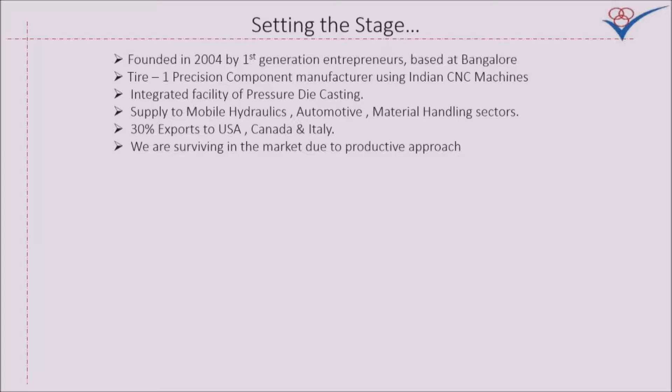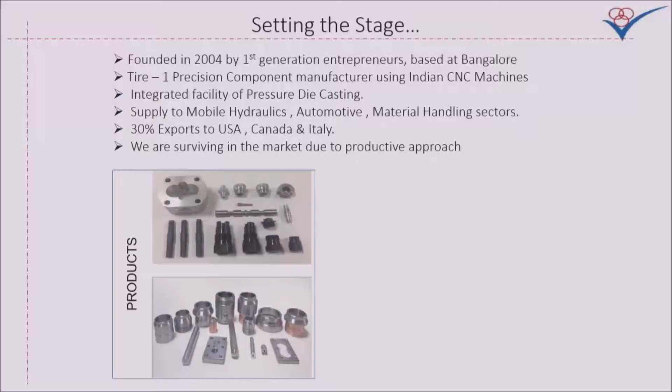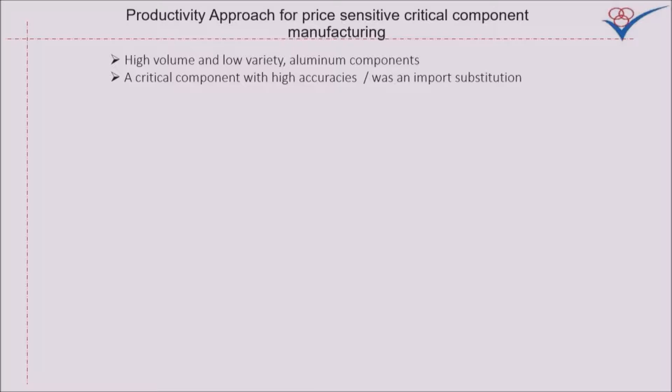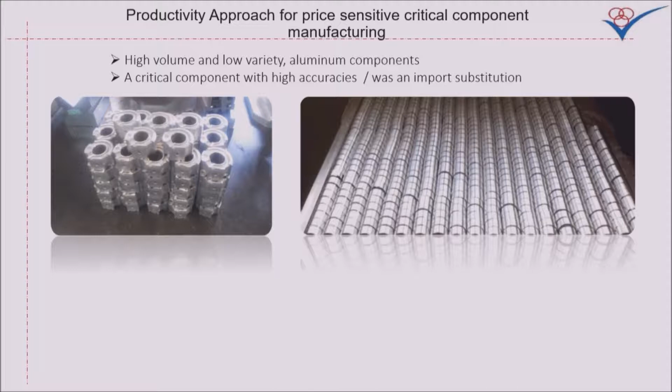Coming to the case study, this is a productivity approach for price-sensitive critical component manufacturing. This component is the object of the case study - required in high volume and low variety. It's an aluminum component, a critical component with very high accuracies. This goes to hydraulic gear pumps, so it required very high accuracies and high volume. When we started this, it was an import substitution - it was happening in Brazil, Germany and UK. Just to get a feel of it, this is the component I'm talking about.

The very interesting fact about this component is it's required about 8 million pieces per annum. The Indian requirement is about 2 million pieces. As of now, we are very successful supplying these 2 million pieces to Indian requirement. Our objective was to expand, because the same component is used in Germany and Brazil. So our objective was to produce this component in the most productive possible way.

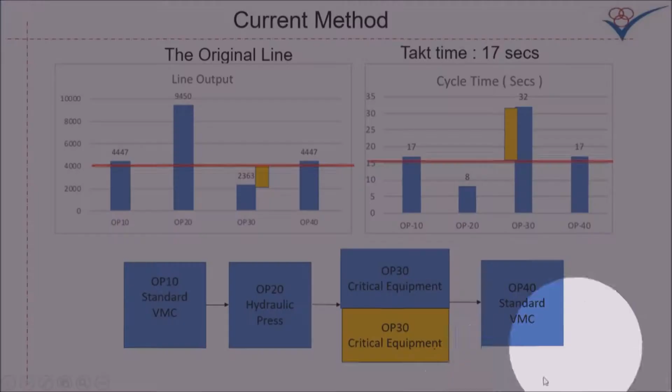Let's go to the current method. We started this originally in 2013. At that time, this was the line we had - OP10, OP20, 30 and 40, the 4 operations. We had done a line imbalance, and the balancing was done by adding the OP30 two machines. So cycle time, my takt, was 17 seconds.

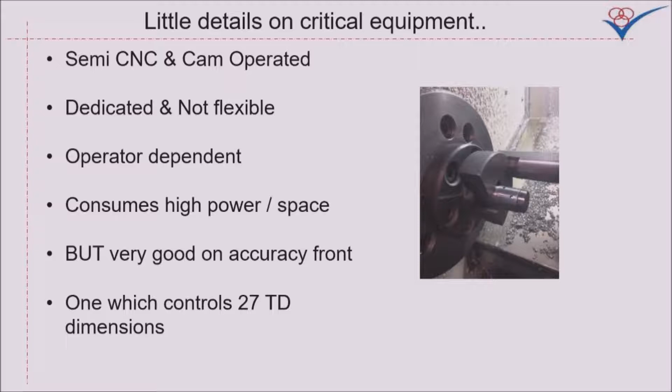We should say something about this OP30, which is the focus area of this case study. OP30 was a machine which is semi-CNC and CAM operated. It was dedicated, not flexible, and operator dependent. There was one stopper which would come every cycle in between. For that, the operator would press a foot pedal or cycle start, and this was adding time. What we saw was the operator, at the end of a 12-hour shift, would have pressed the foot pedal 2,400 times - a huge fatigue factor. But at the same time, it was very good on accuracies - it was controlling more than 27 TD dimensions in this particular operation.

Everything was good till 2015 - we were supplying, we had established good quality, cost, and deliveries. Because of that, quantities jumped suddenly from 4,000 pieces per day to 8,000 pieces, because the customer wanted to localize these components, and also the market grew and cost pressure was phenomenal. This was a good opportunity for us to take it forward. During this period we had done a lot of continual improvements, kaizens and all that, but when the jump was sudden, we felt this may not support - we will have to go for an innovative solution.

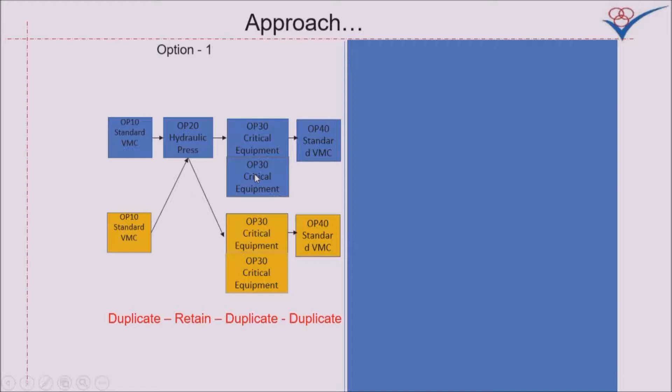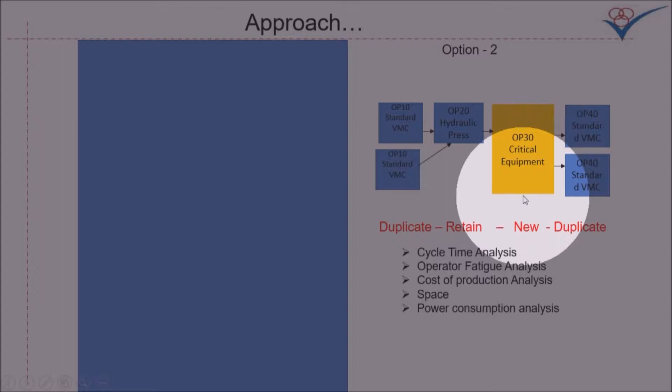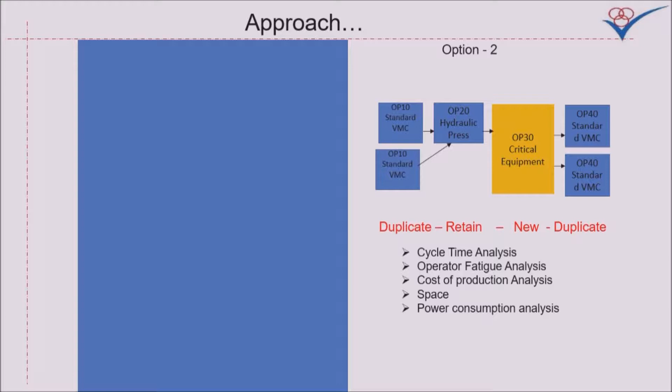This was an invitation to innovation. We had two options: Option 1 was to repeat, to duplicate the existing line and go ahead with established methods. Option 2 was to focus - because we didn't have much problems on OP10, 20 and 40, but we wanted to focus more on the OP30 area. We subjected this operation, this machine, this whole machining system, to various analysis. What we observed was about 47% of the time was used for loading, unloading, and the stopper coming in and going back.

This was required to achieve the required accuracies. The cutting time was only 53%. Of course, cutting time adds all these XYZ movements. So this was one big area of improvement which we wanted to address.

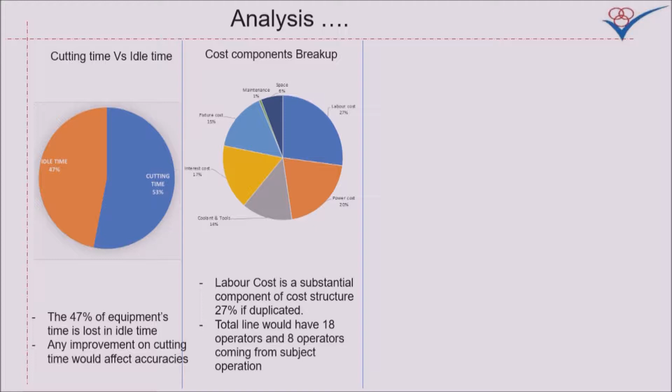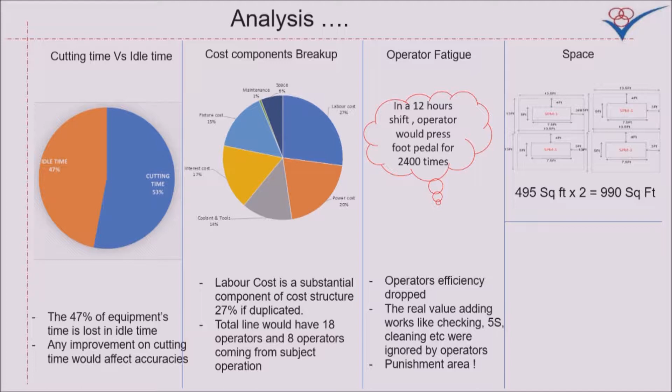We observed that the labor cost would have been 27% of the total conversion cost if we duplicated the machine, because we would require 8 operators for this operation. We are an SME operating 12-hour shifts, so fatigue factors would add up. The operator would press the foot pedal 2,400 times in a 12-hour shift. Operators started feeling that it was a punishment area to work on this. Of course, space consumption would have been 990 square feet if we duplicated, and power consumption was also more.

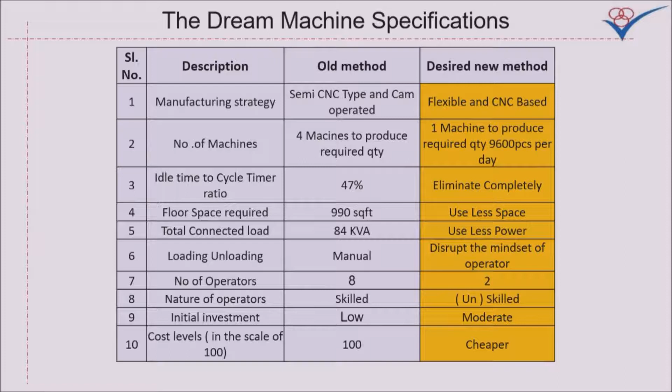With all these considerations, we arrived at the specifications of the desired new method. We wanted a fully flexible CNC machine, one machine which could produce 9,600 pieces per day, and we wanted to completely eliminate idle time, use less space, less power, and possibly use an unskilled operator to run the show.

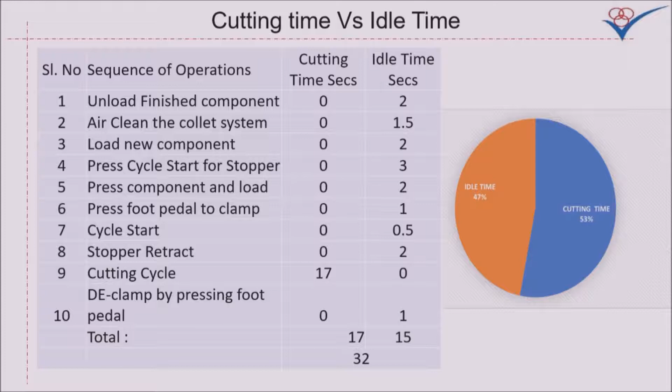So this was just a breakup of how we did the analysis of cutting time and idle time. It's 47% versus 53%. When the quantities jumped from 4,000 to 8,000, the new takt time was 9.5 seconds.

The shift output required was 4,800, and the day output required was 9,600. My machine, whatever we want, should have the capacity to produce 9,600 pieces per day. So we would require 4 machines to reach this quantity. We derived certain inferences out of this.

Probably in the whole of my case study, these two sentences are, I would say, the essence of the whole case. The current cutting time was 17 seconds. It dropped... takt is 9.5 seconds. It meant that 2 spindles should work at a time.

And the idle time, we didn't want to take any idle time. This meant that the working spindle should only work, it should not do anything else, it should not be used for any loading or unloading. Precisely, I would say we wanted to mask the loading, unloading. But these are turning operations, so masking in turning was a question.

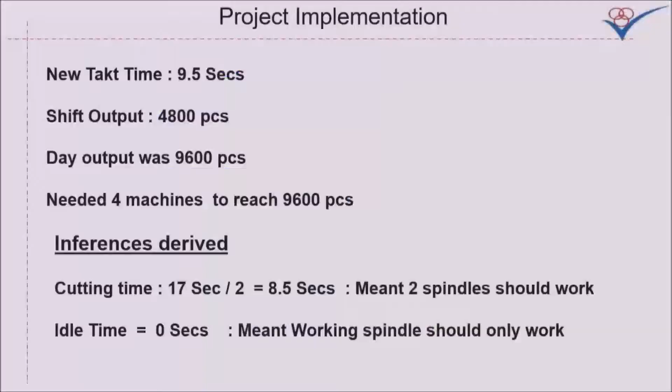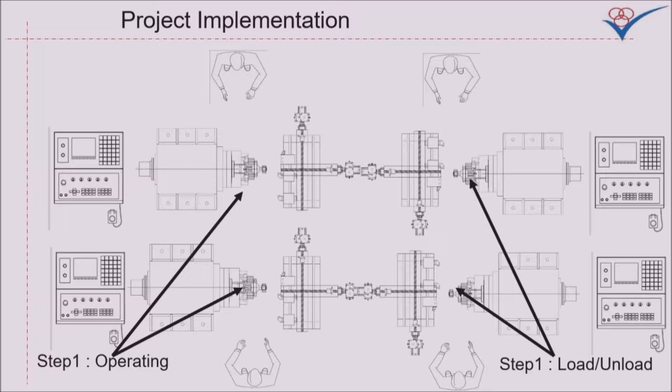When we decided that, we had decided that 2 spindles should work operating, and this should be only operating, it should not be used for loading and unloading. The other side, the 2 spindles can be used for loading and unloading. That is the combination. By doing this, these 2 slides were not required.

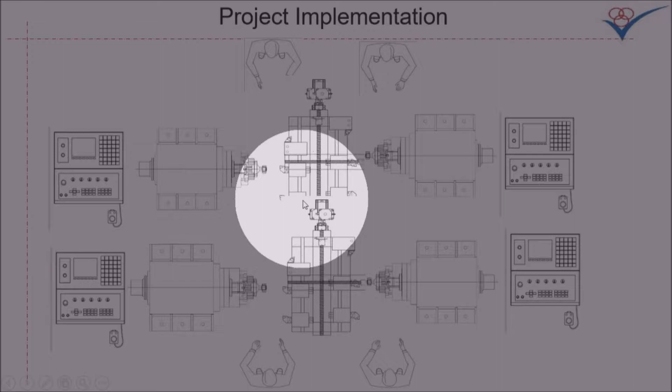So the revised configuration looked like this. The tools could be mounted onto the same slide on the left and right, and because when loading unloading is happening here, these tools have no work, this same slide can go on the other side and finish its work. When it finishes, this side can be used for loading, unloading, and the other side can be used for operation. This eliminated 2 more CNC systems and 2 more operators, and the whole system would have looked like this.

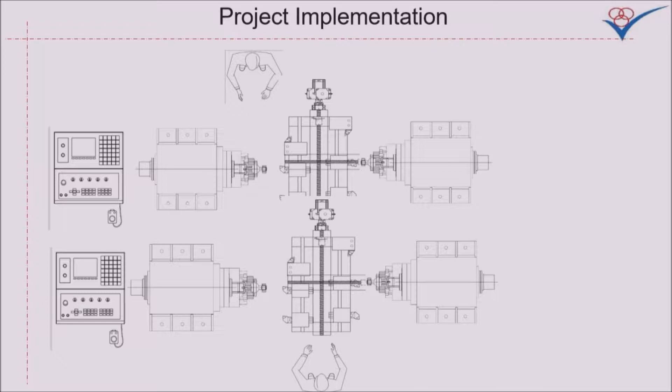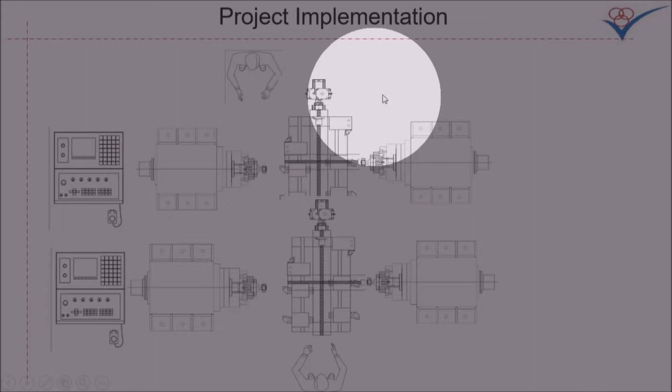But the cutting time is only 17 seconds, and in this 17 seconds the operator would have done the loading, unloading here, and also look after the cycle operation of the component. So with just 17 seconds, we already had a huge fatigue factor for the operators, and we felt that this is too small a time for operator efficiency. So that is when we thought that this is the system which is suitable for robotic implementation.

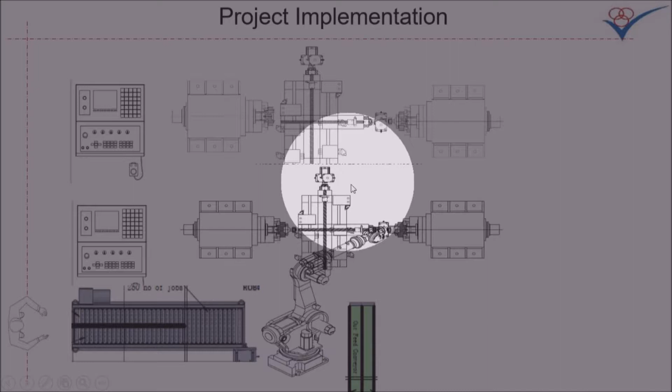Robots do not come alone, they come with all these infeeders, outfeeders and all that. So we would have reduced the whole system to just one operator who would do the component loading onto the conveyor. So this is the overall configuration derived for the machine.

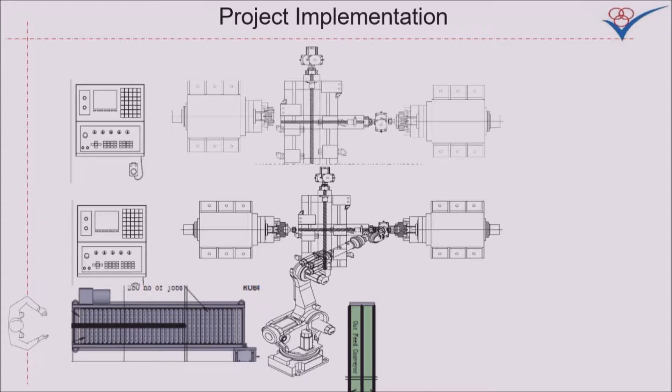This was precisely looking like a pallet changer concept in a turning center. A robot was planned for loading and unloading. It is fully CNC controlled, and to increase reliability, all standard elements of CNC turning centers were used. It was like some 4 turning centers on a single base, something like that. So when we made it, the whole system looked like this.

At this point of time, I want to remember the machine tool builder, who was an SPM builder, who built this whole machine.

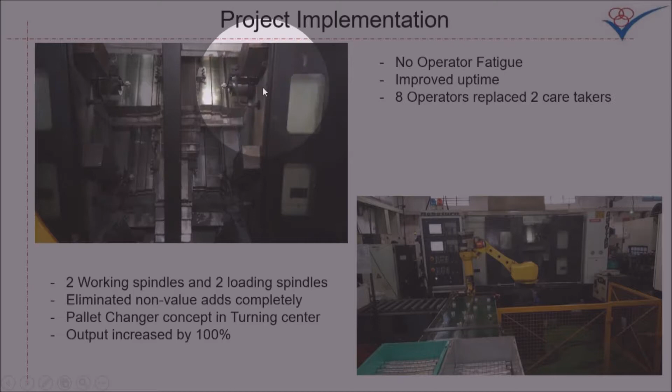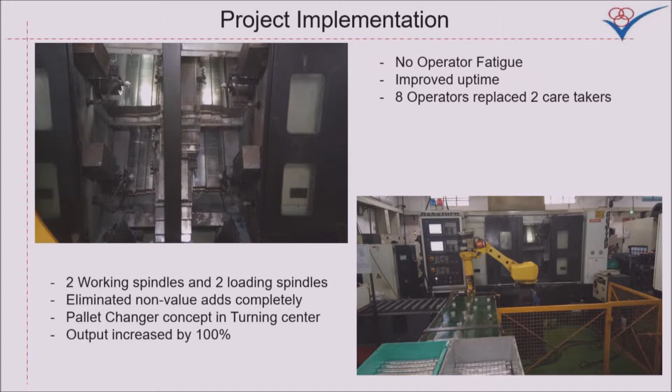As I explained, we have 2 spindles here which are the working spindles, and 2 spindles here which are used for loading, unloading alternatively. When this spindle is working, the other would not work. When the other spindle is working, the other one will help. So we'll just see a small video on this.

So now you can see the machining is going on in this area, and the loading unloading is happening on the other side. By the way, we had 2 varieties here, LH and RH. So the first 4 components on the slats conveyor is loading LH components, and the other side it would load the RH component. Here also we have the partition.

So this is what was established in 2015-16, and yes, the whole journey of establishing this was not as smooth as what I explained or narrated. So we did have quite a few challenges.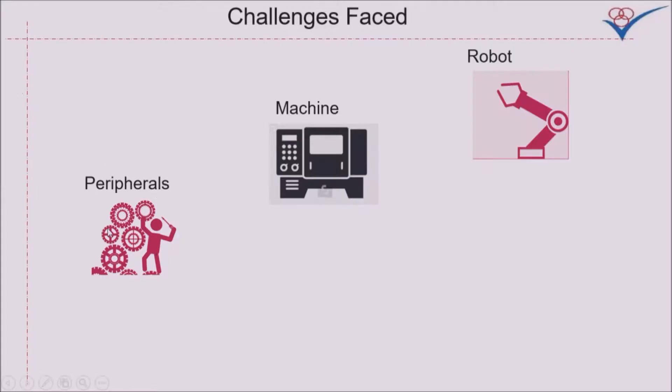If you see the whole system, we have three things here: the robots, the machine, and the peripherals. So if I put it in the scale of technology and reliability, the robots are a very high reliability item. The robot we bought from a world leader, but like all other entrepreneurs, we also made a mistake, like getting the global robot and using a local end effector. So this end effector reliability matters a lot to balance the overall reliability of the system.

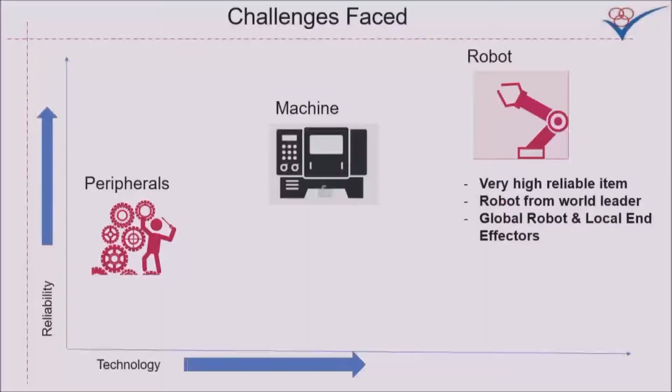When it came to the machine, all standard elements of a turning center machine were used - could be LM guides, ball screws, clamping cylinders. These machines, by the way, had glass scales on both axes to control the accuracies. For us, it was a standard machine, but for its configuration.

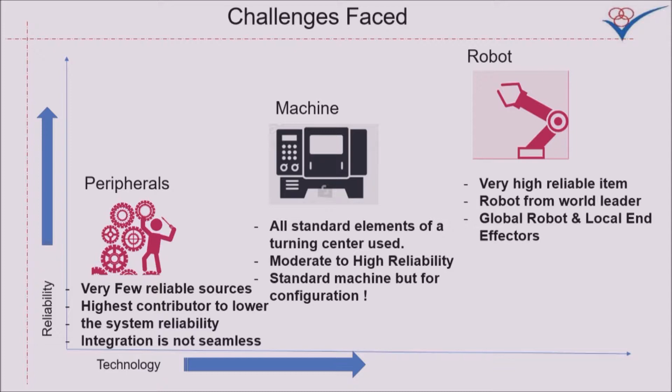The real worry was in this area of peripherals. Very few reliable sources - this was the highest contributor to lowering the overall system's reliability. Integration is not very smooth. So it's very essential to bring the reliability of the peripherals up to the tune of the machine, if not to the tune of the robot. If I see my breakdown register of the last 3 years, the major breakdowns are coming from the peripheral side.

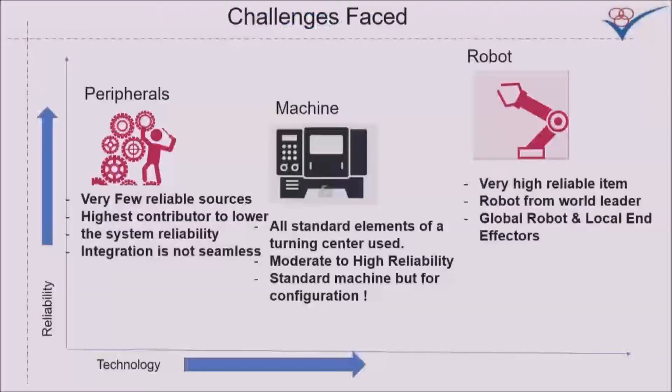Whereas the robots and machine side, there have been very few breakdowns. So we learned a lot of lessons. The reliability of the whole system is very important, including the in-feed component. Because when it is a manual system, we don't care about the in-feed component - little bit of burrs here and there, the man can adjust. But the robot cannot understand all that. It has to be understandable to the robot.

Robot grouting is a must. We are tuned generally to place the CNC machine, level it and start using it. So with that knowledge, we tried to go with a similar system for the robot, which is wrong, because of the huge inertia movement, we require robot grouting. So with global robots and local end effectors, we have to invest a good amount into the accuracy of the end effectors.

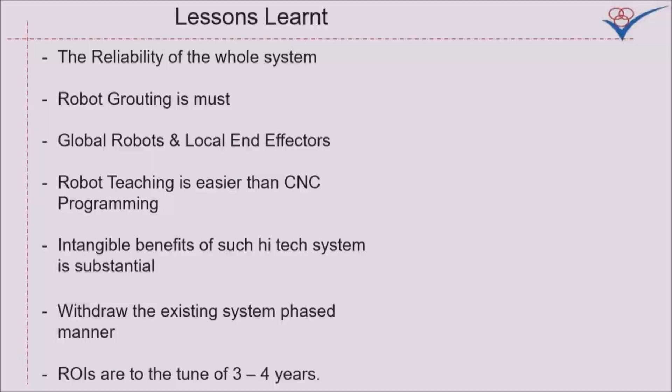This was very interesting - the robot teaching was much easier than CNC programming. CNC programming learning was rather difficult. So we had a lot of intangible benefits of such a high-tech system - intangible in the sense we talked about a lot of culture building for the people and these things.

So what I observed here was that we could shift the skill to the machine. We were able to shift some amount of cultural changes also to the machine. In an SME, it's very difficult to hire very good people, retain them, and train them - these are challenges we have. So by bringing in this system, I felt we had shifted some cultural issues to the machine, wherein the machine is taking care of that. By virtue of that, the operator's culture also would improve. So this demonstrates a high amount of

commitment to my customer, to withdraw the existing systems in a phased manner. The return on investment was not very high - generally we have a myth saying it is 8 to 10 years, but it was not so, it was 3 to 4 years.